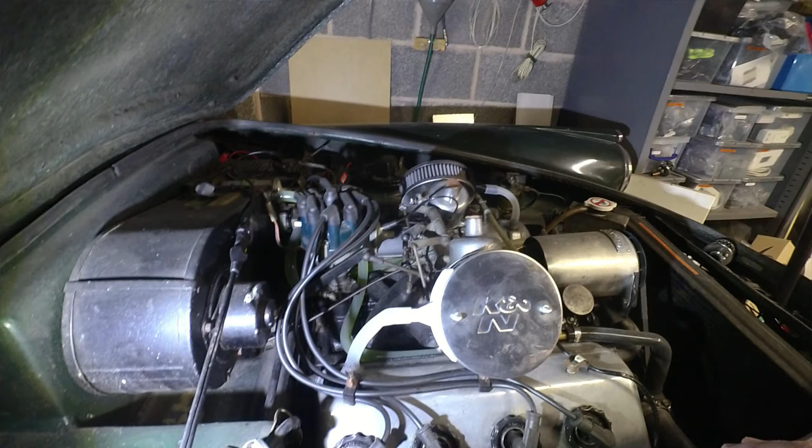Okay, so this test oil breather adapter has been on the car for a while now and is working absolutely fine. There's no sign of it being affected by heat, for instance, or oil or whatever. So the only thing I've realised since printing it is that this adapter section here, which is 15mm, kind of points the wrong way. It needs to be angled slightly back. So what I'm going to do is to make that change and print up some more.

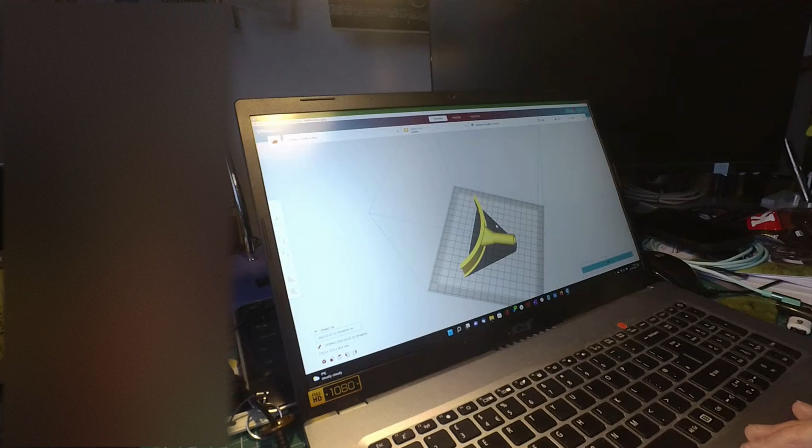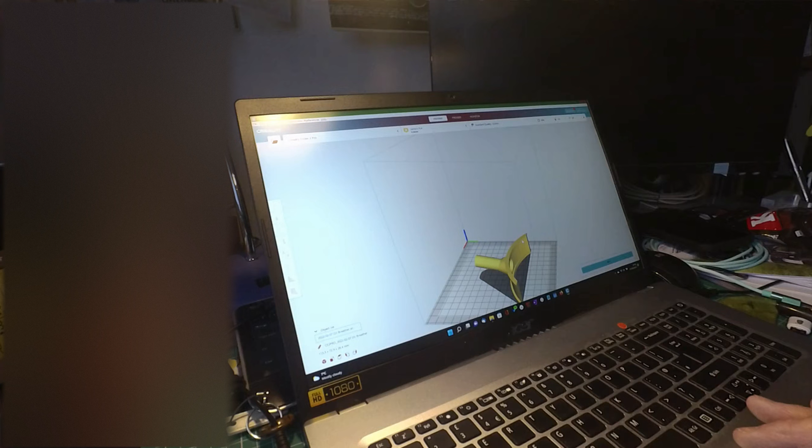Right, so this is the model. My son kindly did the CAD on this, and this is in Cura, the software that generates the G code for the printer. And yeah, you can see the basic shape. So this is obviously the section that fits around the air filter, and that's been measured from the air filter to be the right radius. Then there's this conical section here leading to the 15mm tube on the side.

These little flanges allow for the wires to be held on, to secure this to the filter. In this case, though, the one on the car that you just saw, this 15mm tube is coming just straight out the side. On this modified version, it is angled up slightly, as you can see there. So hopefully that will be better.

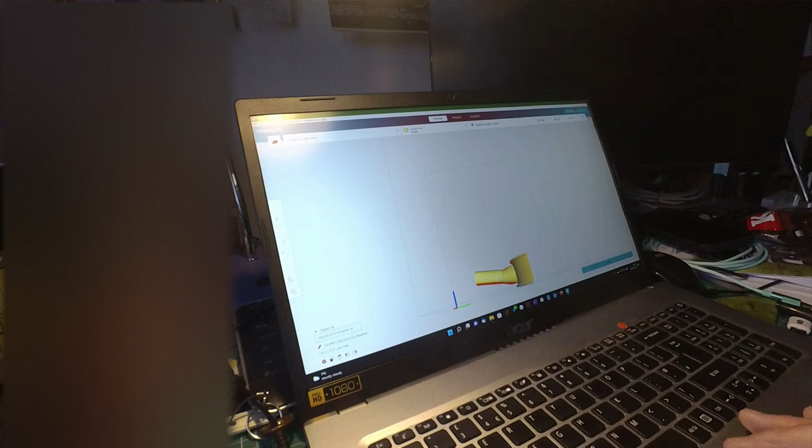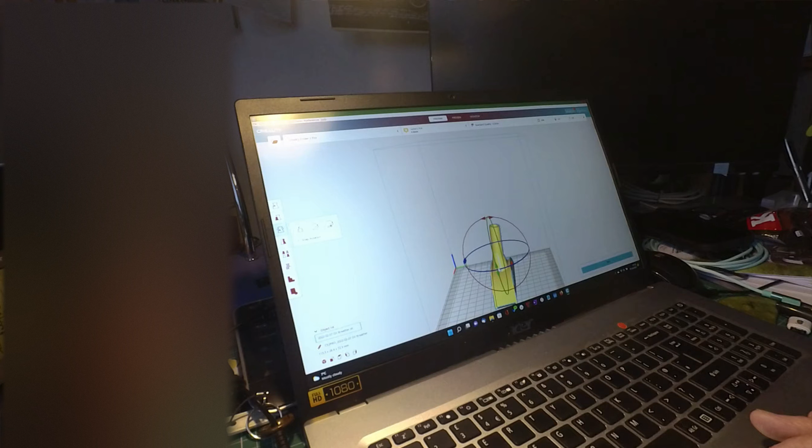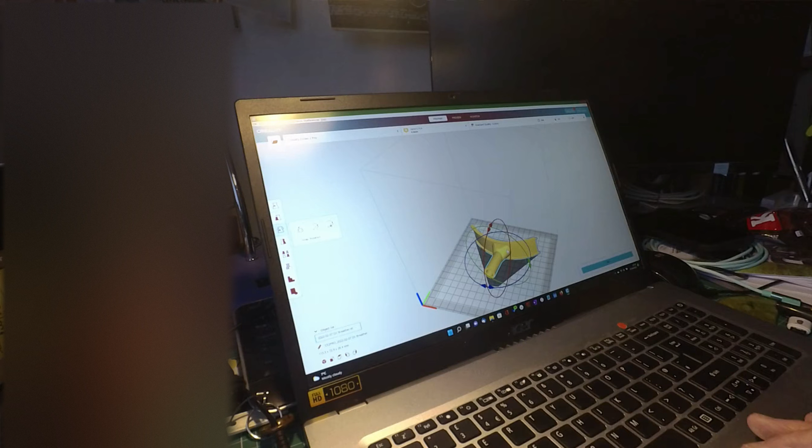The orientation for printing is interesting. It could be done the other way around. One logical way of doing it would be to rotate it upwards. Oops, like so. That has the advantage that this hole stays open. There's no support material required in the hole. Downside is it used a lot of material in this section under here. So I've actually chosen to print these the other way around. Like that's the wrong way around. That way around, which seems to work okay.

So if I run the slicer, because the issue with 3D printing is that it's printing in horizontal layers, and the layer being extruded from the printhead has to be supported by something. So a surface like this, for instance, underneath the tube, you can't print that in fresh air. So it needs to first print some supporting structure underneath. And so the challenge is to minimize the amount of structure and also just get the printing running in the right direction to get the best result.

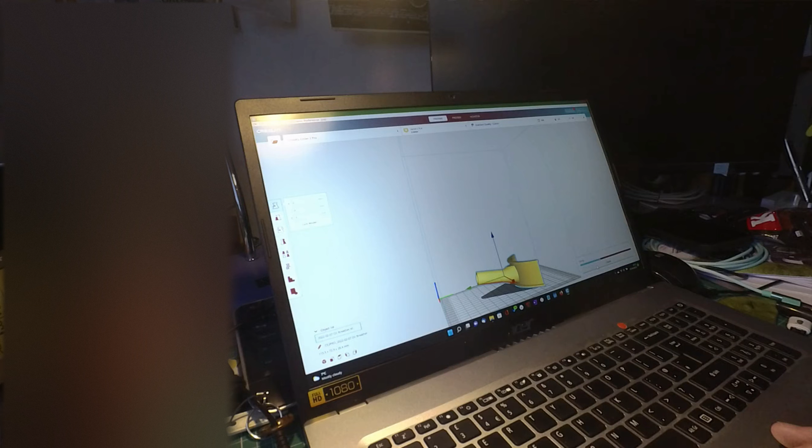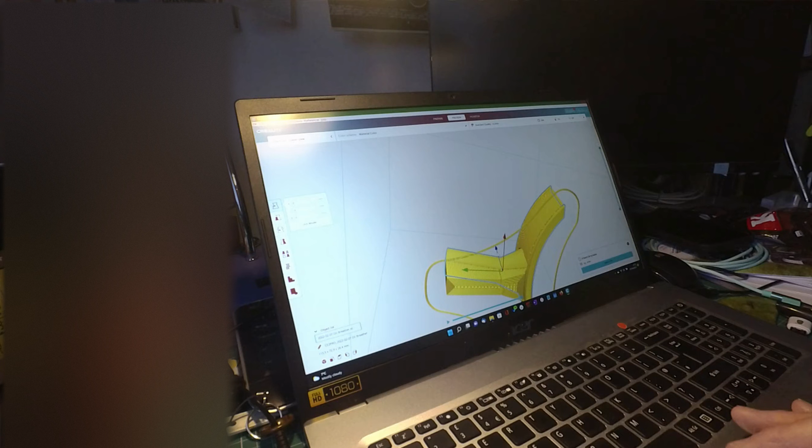So let's slice this now and preview. And there you go. See the support structure now has been added to this section under here, which wasn't there before. Try and make that a bit bigger. Yeah, see there's the tube, and then you've got the support structure underneath. And you've also got supports inside this surface, and indeed this surface, because these flanges can't be printed in fresh air, so you need to have some support underneath.

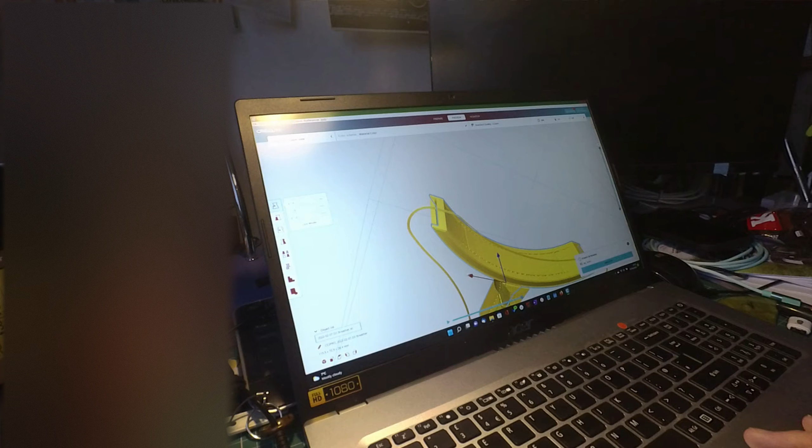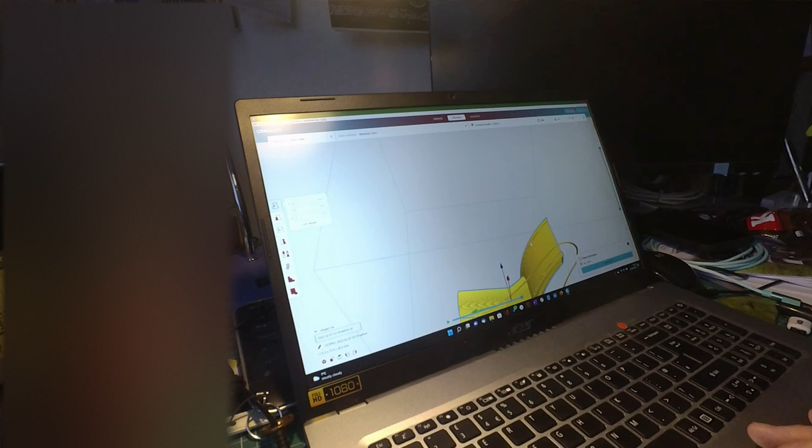So there's quite a lot of support material, but printing it the other way would have had this whole area filled in with support material, which is the way I printed the other one, the white version, the prototype. But in this case, I'm going to print it this way. So I can just output that as G code to an SD card and stick it in the printer.

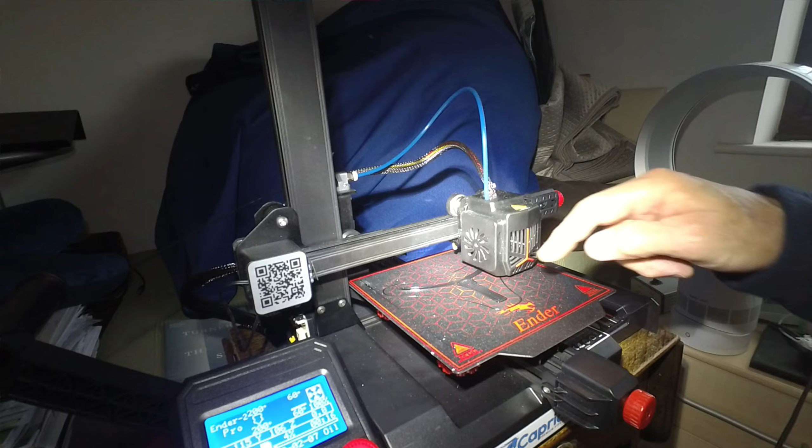So is the printer running? It's just started, and you can see, I hope, the outline of the oil breather shape starting to appear. It's going to take a while. It's going to take probably about 5 hours. The printer's running quite slowly because that seems to give a better quality of print on this machine.

This machine, by the way, was given to me by my son, which was an amazing birthday present. It was very much appreciated, and it's proven to be great fun. And I've printed loads of stuff already, and I can also print these myself now rather than relying on his machine, which is down in London. So yeah, it's going to take a while, but it's on its way.

So the printer's finished. I'm just taking off the support material. And this piece, where was this piece? That piece was under there. That was the part that was supporting this tube while it was printed. That just snaps off, just breaking off these other pieces. It's come off pretty easily, mostly. Not sure about the material in here, it's going to be interesting. But it just snaps off.

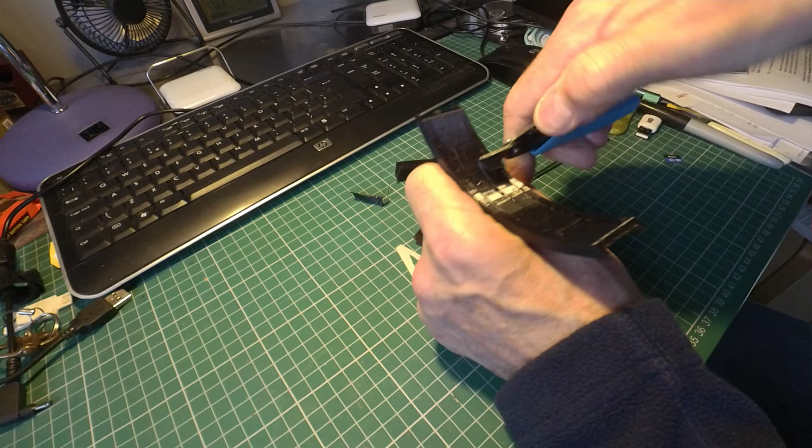The software that generates the support structure is amazing to my mind. There's obviously a lot of work gone into it. And it detaches quite easily, and yet it's provided enough support for the printing process to work effectively. There's these inner sections which go down to the conical entrance to the tube. You see the hole starting to appear now.

There you go. So you can see now I've got the lip here. It's a bit of area for the air to be sucked through, or the oil vapor to get through to the filter in there. And need to clear up this side as well. On this side there's the flange, there's a small gap here for the 1mm stainless steel wire, just to be held in place as it clamps this onto the side of the K&N filter.